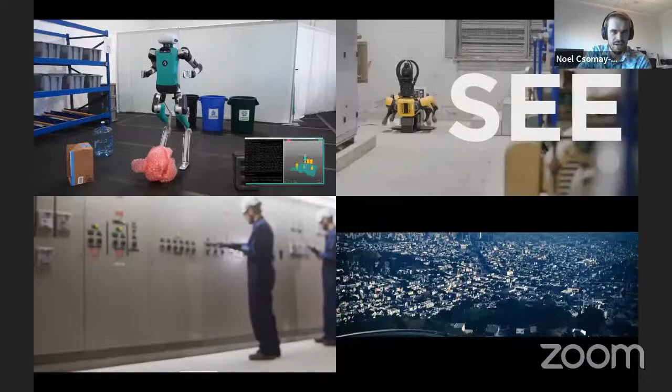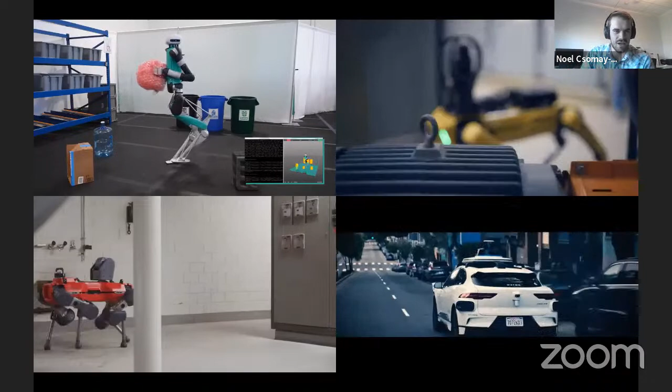So maybe just to set the scene, where are we with the status of robotics today? We're seeing deployment of systems in a way we really haven't, even a decade ago. Digit, in the top left, just got employed by Amazon. We have Spot and ANYmal in industrial settings doing inspection, and self-driving cars all around.

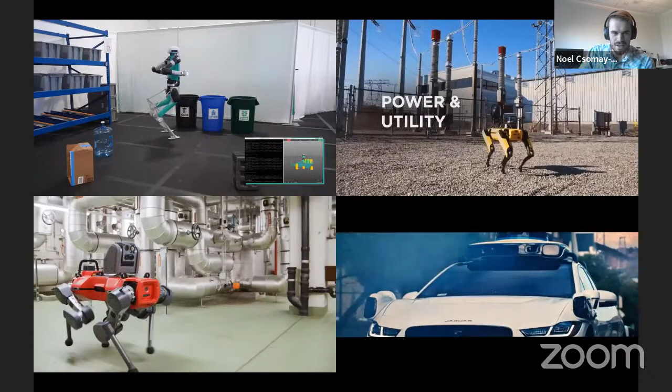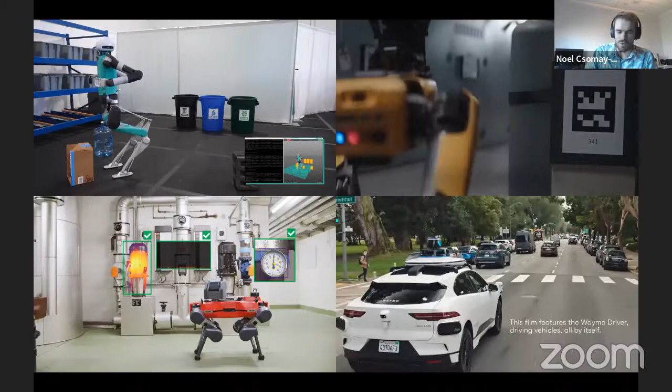So we can now, for the first time, really start to ask systems-level questions. Can I complete some task, and design a whole stack to accomplish that, all the way down to the motor torques? This is in contrast to before, when maybe 10 years ago we were falling around and didn't even know how to walk.

The problem setting we're going to focus on is this abstract one: on the left-hand side, I'm asking a robot to complete some task, and then I want to design some sort of policy where at the end of the day I have to send torques to the robot.

I was listening to a talk by Animesh Garg at ICRA, and he had this beautiful separation of what we're trying to do and how we're trying to do it. We're going to focus on how to achieve these tasks, and I'm assuming that the semantic level understanding of what we're trying to do has been taken care of.

So instead of abstractly saying 'complete some task,' let's say specifically that it has been parsed by your favorite language model and a LERF to give you a goal location and maybe some understanding of your environment and the obstacles in it.

The classical robotics perspective on how to achieve a task like this is to split it up into subcomponents. Maybe first we'll do a high-level plan, like a decomposition of my space, giving me waypoints. Then from those waypoints I'll produce trajectories at a mid-level. And at the low level, I'll try to track those trajectories, and that'll give me torques.

One benefit of splitting it up this way is that each level has a canonical model associated with it. At the low level, I have to reason about the full nonlinear dynamics of my system, because that's where I'm applying the torque. At the mid-level, maybe I have some discrete-time but continuous-space representation. And at the high level, maybe I have a graph structure. By splitting it up, I can leverage these different model representations.

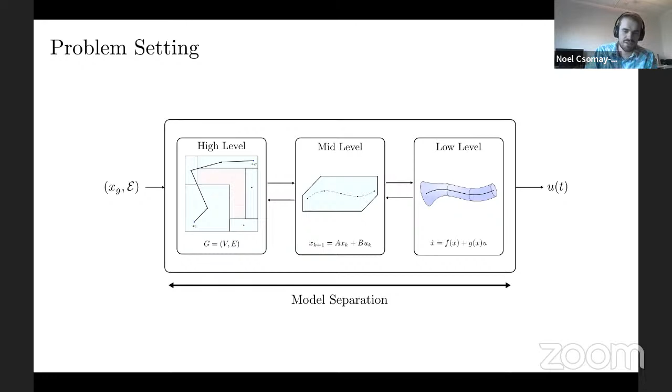Furthermore, there's a timescale separation. At the low level, I have to execute very quickly for dynamic stability, but at the high level, I probably don't have to reason so quickly about my environment.

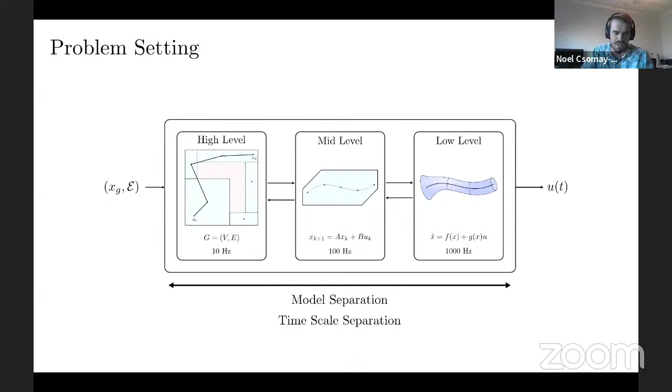We're going to explore this in the context of some recent work I did with a hopping robot. Just to give some concrete instantiations of these levels: at the low level, we're trying to command torques to spin these motors; at the mid-level, I'm producing trajectories for stable hopping; and at the high level, I'm trying to reason about how I'm interacting with my environment.

This interaction with the environment is something I'm currently working on, so I'm not going to talk about it very much in the context of the hopper, but we'll discuss it a bit.

Since we'll be using this platform as a motivating example throughout the talk, let's introduce it. This was designed and built by a previous graduate student in the lab named Eric Ambrose.

The state of this robot includes an orientation and a position, so SE(3), and also four additional coordinates for the flywheel angles and the foot position. The input has four components: I can control the flywheel motors, and I can also compress the foot.

And you'll notice that the number of inputs is far less than the state of the system. So this is a very underactuated system, which means the control has some complexities, which we'll discuss. And in terms of compute on board, there's just 2 teensies doing the feedback control, communicating over Wi-Fi with this off-board desktop, which I would say is decently powerful.

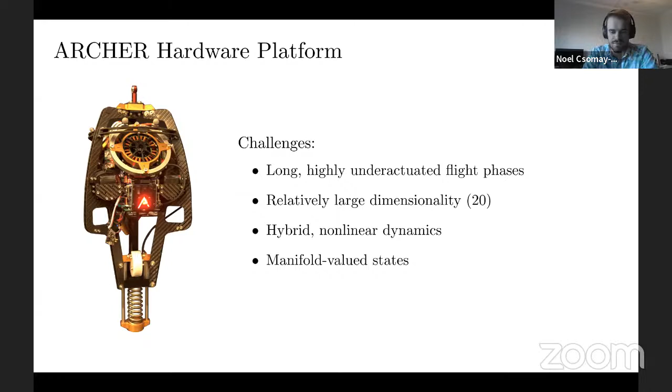Okay, so let's take this system in this example scenario. Let's say I'm starting at an initial condition and I want to get to some goal location. And here's a map of my environment, some clutter. And remember, this is a state space of 20, my input space is 4, and I've got nonlinear dynamics.

So what's one way maybe to achieve this task? Well, let's take a high-level perspective and maybe do some sort of kinodynamic path planning, some RRT with some refinement at the end. Maybe this was actually kind of hard to do, right? Because I have to reason about the full state, these hybrid nonlinear dynamics, and I have to solve these 2-point boundary value problems or roll out these open loop trajectories to stitch together.

And at the end of the day, what do I get? Well, I get a sequence of these open loop control actions. And if I play those forward, I'm probably going to diverge because I'm using model approximations and I've got disturbances at the end of the day.

So what would I do instead? Well, what I would rather do is just say, what's the task space that I'm operating in? Well, right here, I'm just considering the plane. So why don't I just consider states in the plane, some 2-dimensional state? And if I had 2-dimensional inputs where I could control the XY position or XY velocity, let's say I have single integrator dynamics, that would be best. And I would just hope that when I pass that plan down, somebody is able to track it properly.

Now, the somebody who tracks it properly is me. So we're going to talk a little bit about what it takes to track a signal like that, why it's even well posed. But if you do this, this is kind of a decomposition of the problem. You still might crash into your obstacles or diverge. And that's because the tracking controller that we design is probably not able to execute the plan perfectly.

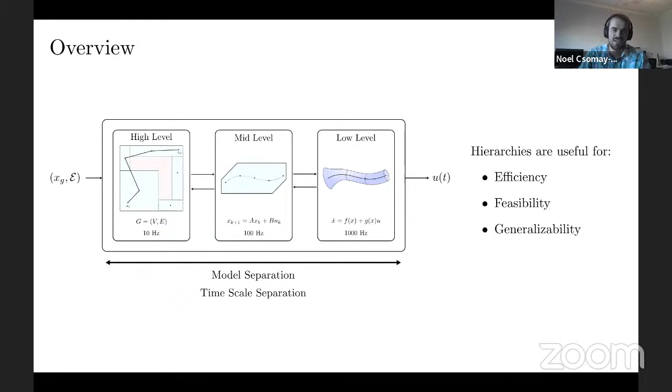Okay, so that's kind of the summary of what I want to talk about. When we think about tackling these complex problems, thinking about it in a hierarchical way is useful because of efficiency, feasibility, and generalizability.

Okay, so here we are in phase 1. This is me about to take a deep dive into control. So we'll go through that and then we'll resurface back in the context of these other points that I wanted to make.

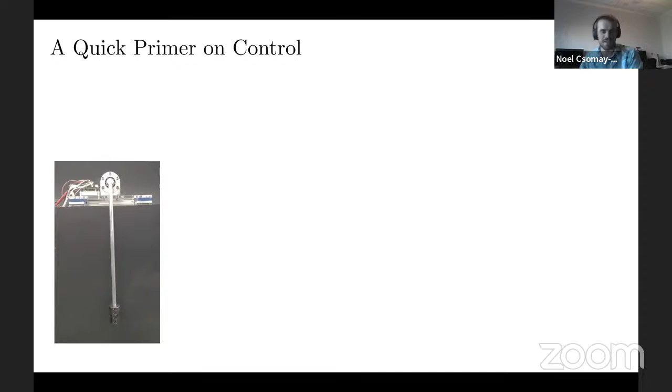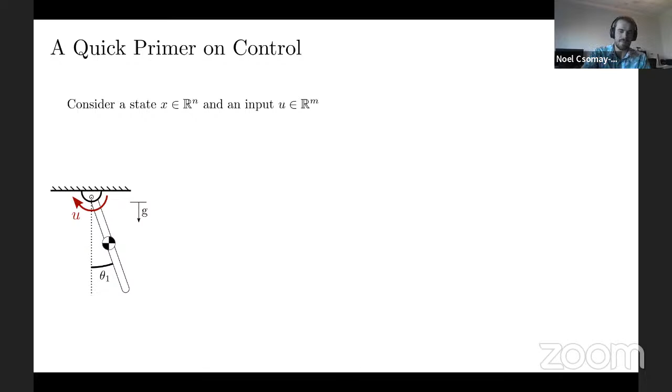Okay, so here we are. I'm calling this a quick primer on control. So what's the point of control? Well, I view the point of control as getting systems to do things, or meeting objectives. So here's a system, this is a pendulum that I just found in the lab and took a picture of. So here's a physical system. We're going to start with some mathematical model of the system, so I'll take a state and I'll consider the input. And how are the states and inputs related? Well, they're related through the dynamics.

So the time rate of change of my state is a function of the current state and also the control input that I'm applying. So how do I view dynamics? I view it as a vector field. And how do I view controller design? I'm trying to shape the vector field to have a desirable property. So now we have to have the language of what's a property that I could want my system to demonstrate.

One of them, for example, is stability to a point. This is a classical thing that we would want my system to do. Let's say X star here is the origin that's given to me maybe by a high level planner, and so I want to say I can exponentially stabilize to this point. Here's how I would write that down: the error signal is bounded by this exponential curve.

This is a statement of what we want to achieve. So now we ask the question, how do I choose a feedback controller to give my system dynamics some desirable property of stability, to shape this vector field in a desirable way? One way to think about doing this: we have the expression right here, let's solve for x of t in terms of u of t. Maybe I'll get a condition of what U of t should do in order to satisfy this specification.

Now, as a little exercise, let's try to think, what is x of t for the pendulum? And spoiler alert, you can't write x of t in analytical form as a function of u for the pendulum, even for the simplest system. There's ways to approximate it, sure, locally it's like a sinusoid, and then maybe I can do some sort of approximate trajectory for it. But at this level, we're focused on precise statements. What can I guarantee about the system? And so if we can't write the solution down, what hope do we have of saying that we'll meet some stability criteria? This is where I think there's some beauty in what's called Lyapunov theory.

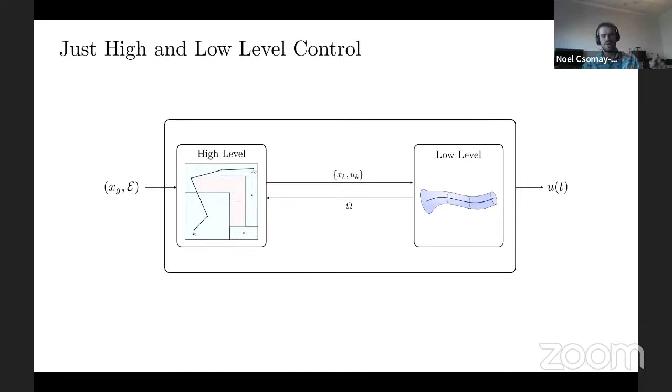Okay, so now we're experts in nonlinear control. Let's plug the pieces together. Let's take the plan that we got from the high level and just track them. Let's do this for the system of interest, the hopping robot, and let's see what happens.

So the high level objective is just to stay where you are. It's maybe not quite a high level objective, but that's what we're taking it to be. And I'm starting with some sort of error in my initial state, and I'm just using feedback control. We see that the hopper starts to diverge, goes to the right, and is unable to go back to the original position that I wanted it to go to.

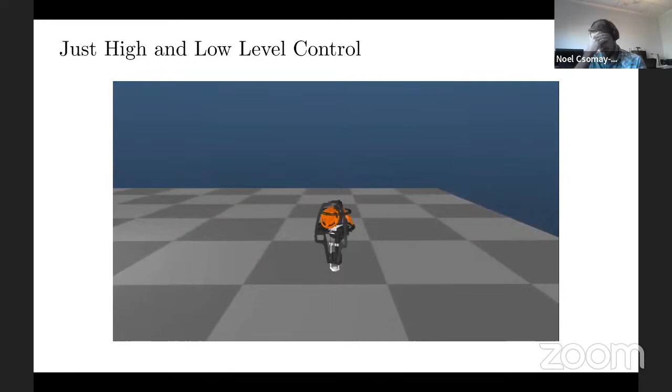Okay, so this kind of counters what I was talking about. We said, well, we can track trajectories, but now it seems we're unable to do this. And the statement of why that is goes along with my perspective on why low-level control is not enough to achieve this task. It's exactly what I talked about: the construction of which error coordinates are valid.

So if we look at the hopping robot, I have actuators to control the orientation. But when I am in the flight phase, when I'm in the air, I cannot control the lateral position of the hopping robot. This means my control input has no effect instantaneously on where I am in positional space. And because this Lyapunov condition is an instantaneous condition, I cannot choose this XYZ position as a valid output.

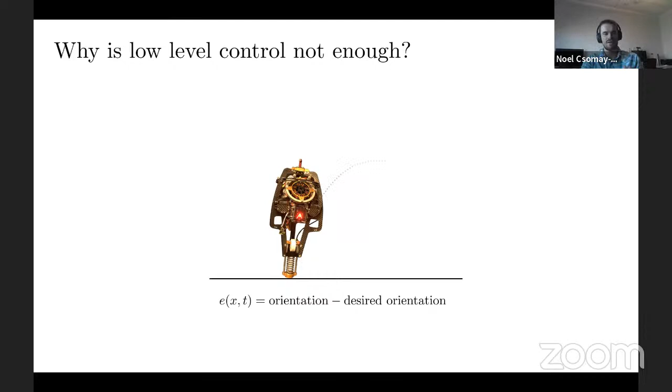Okay, but I have actuators, so what can I do? Well, I can choose the orientation to be my desired output, and I know I can converge the orientation exponentially fast. But then after some finite time, because I'm converging exponentially fast but not in finite time, I'll have some error when I hit the ground. That error will propagate, and that'll lead me to start diverging.

So to summarize what I just said, output stability is not the same as full state stability. This really comes to a head in the context of underactuated systems, when I care about stabilizing my full system state. Now, another limitation of just having low-level control is that we did not reason about input constraints or state constraints. So when I said there exists this controller where I'm canceling my nonlinearities, that might take arbitrarily large torques. But for this system, for example, there's a maximum torque I can apply.

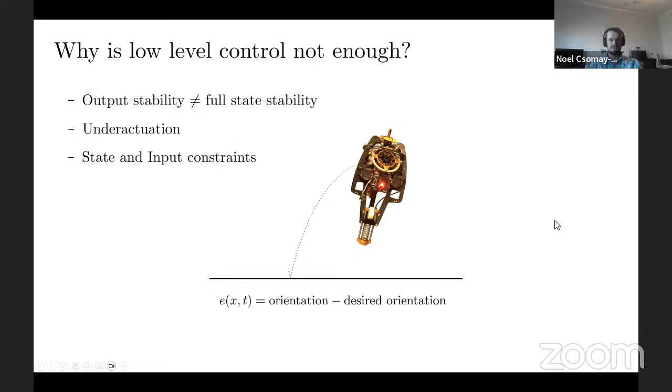So how do we reason about state and input constraints? And how do we reason about stabilizing the full system state? Well, this motivates the introduction of a mid-level, right? How do we do intelligent trajectory design? So now I'll talk a little bit about model predictive control in the context of how it was used to stabilize this hopping robot.

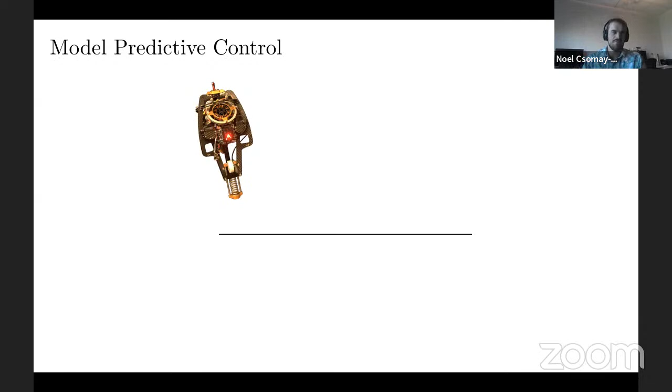Okay, so what is model predictive control? Well, I take my model and I predict how my current control actions will affect my future state. So as opposed to having these instantaneous convergence conditions, now I'm planning over a horizon.

How do I do that? I solve this finite time optimal control problem. So I'm solving for a trajectory, a state and input trajectory in time, which minimizes some cost, subject to my nonlinear hybrid dynamics, satisfying my state and my input constraints. And that starts from where I am.

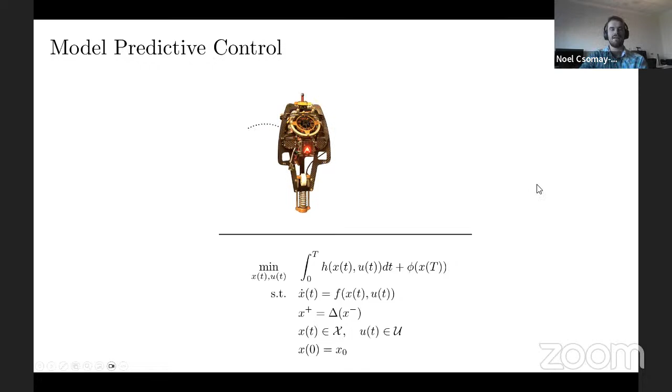What do I do then? I apply the first control action along this trajectory. And then to get some sort of closed loop performance, I replan.

Okay, so the first part of MPC is the model. Let's just discuss the hybrid model for the hopping robot. So I have a flight phase where I have these continuous time dynamics. Then I go through a ground impact where my foot velocity goes instantaneously to 0. So I've got this jump in the system state. Then I have some ground dynamics.

Then, those execute quite quickly. And then I hit the hard stops of the robot and I enter the flight phase again. So this forms 2 cycles on this hybrid graph.

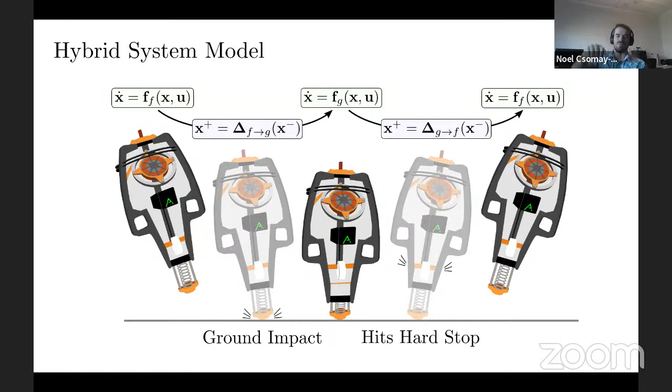So when we're planning, we have to plan over this full hybrid state. And the reason we have to do that is because when I'm in the flight phase, I can't control the position of the system. So I have to decide what orientation should I be in when I strike the ground, which means we have to plan through the strike of the ground in order to determine what I should be doing in the intermediate steps.

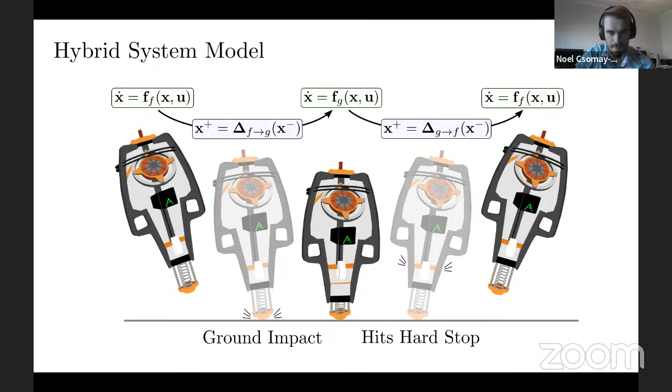Okay, so maybe a little bit quickly, how do we structure this problem of model predictive control? So I've got my dynamics, these hybrid dynamics, but as I stated, this finite time optimal control problem is infinite dimensional with these non-convex constraints. So we have to use model approximations.

So what can I do? Well, I can linearize my system dynamics around some reference trajectory and then discretize. And so now I've got this discrete time linear system that I can use for planning.

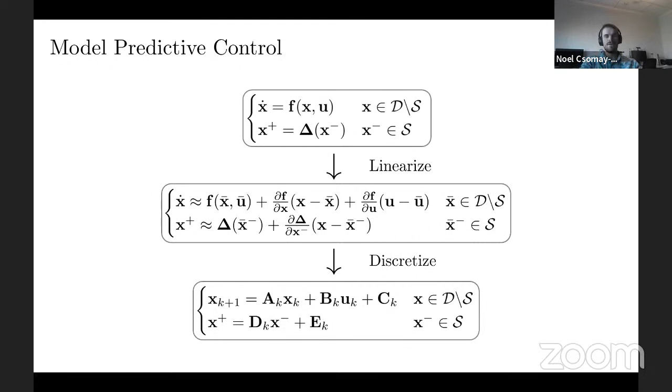So there's one issue, especially in the interface of how this model predictive control layer goes into the low-level controller. The low-level controller requires dynamically admissible trajectories. But because there's this space of orientations that the hopper lives on, if we just approximated that constraint of this orientation manifold, I would get states that leave this manifold constraint, and they would not be admissible when I pass them to the low-level controller.

So part of the effort of this was phrasing MPC in a geometrically consistent way in order to make the interface between it and the low-level controller sound. So just in pictures quickly, how do we do that?

So if I have some reference trajectory that I want to linearize my system dynamics around, I can pull the start of that trajectory back to some identity element, like the identity orientation. And then I can use what's called the log operator to get me into a vector space. So now I've taken this state that existed on a manifold, and I'm in a vector space now where I know how to take Taylor approximations.

I know how to approximate my system dynamics. I can solve for a trajectory in this vector space, and then I can project it back onto the manifold. And this is locally a bijection. This projection operator is exact.

Okay, so those are the pieces of how we phrase this in a geometrically consistent way. So now the decision variables of MPC for this hopping robot are the full system state, including these geometrically implicit states. And what do we do? Well, I phrase this now as a quadratic program.

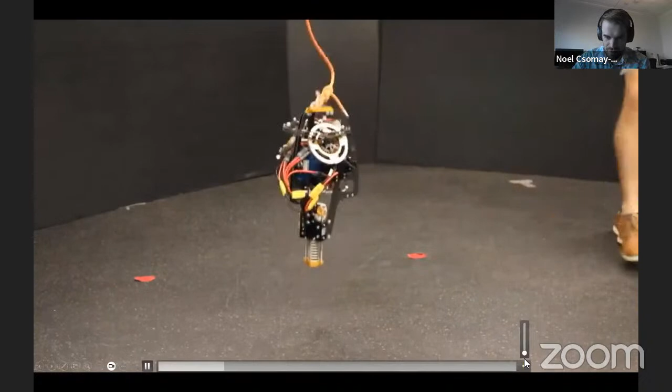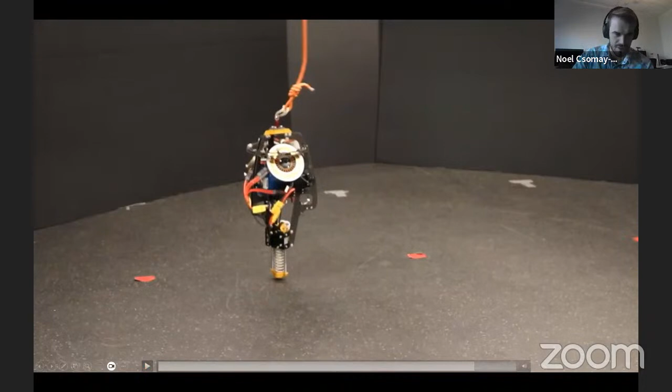Okay, so what's the result? Maybe we said we like robot sounds, so I don't know if that's coming through, but the result is that we can get stable hopping on the hardware of this robot. And here it just, I'll just play it until the end so you can see. The foot stopped after 50 hops.

And then lastly, because we phrase this in this geometrically consistent way, we can explore the space of orientations and do flips on a system. So that's a fun little result as well.

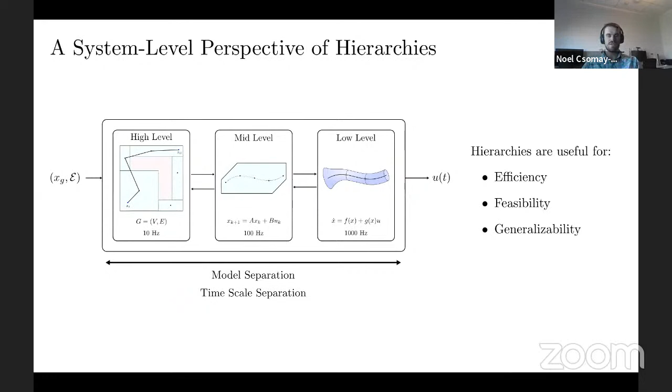Okay, so that was a deep dive into this block of low-level control and this block of mid-level control, especially in the context of the hopper. But now I want to take a step back and present this system-level perspective of hierarchies, right? So when people are doing the design of algorithms, they're embedded in these individual levels. How do I construct a feedback controller which is able to track? How do I construct a good mid-level controller? But I think a lot of the interesting questions here are, how do I interface these pieces together? And if I think critically about the interface between these pieces, what do I get, right? And the points that I want to make and reinforce are, I get notions of efficiency, feasibility, and generalizability. So let's explore those in the context of these hierarchies now.

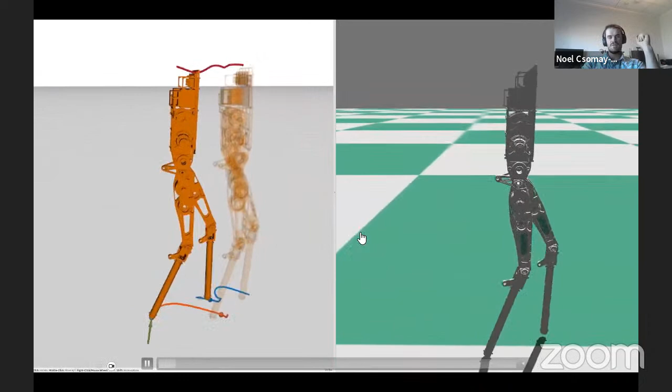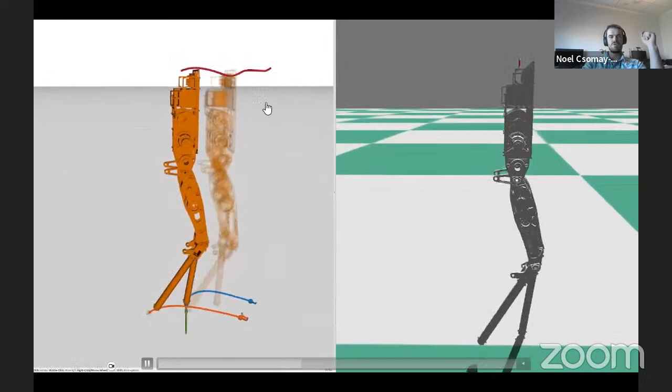So here's a demonstration of, again, a very similar methodology, but applied to a new system. So here we see the horizon, the forecast of MPC. Here's the forecast of the footsteps. And this is as we disturb the system, it's able to stabilize dynamically. So it's adjusting its footstep length to account for these disturbances while trying to track this user command of walk forward at a specific speed.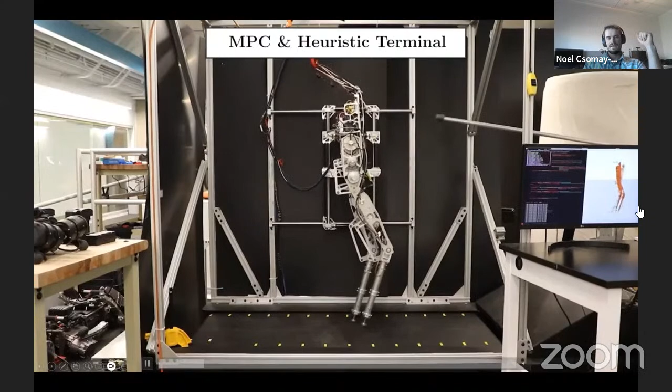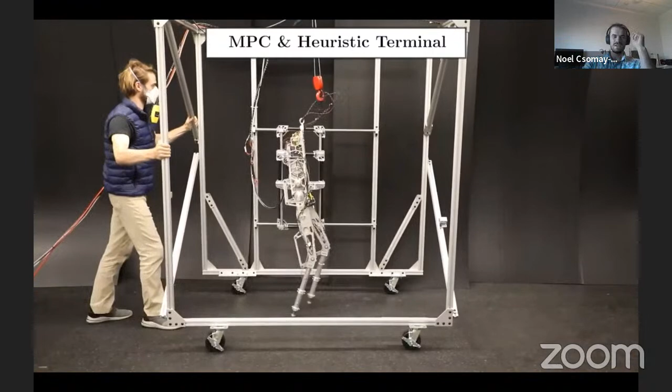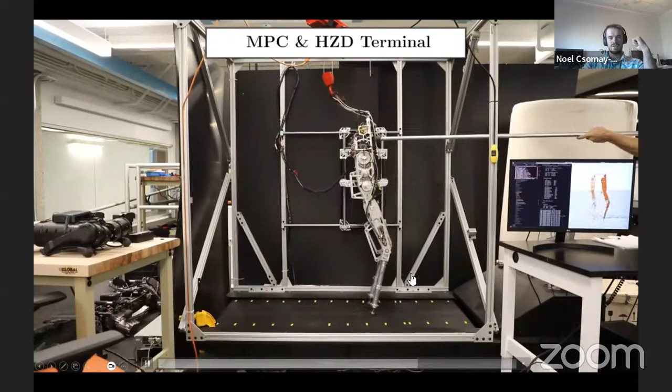And then we can also show this on hardware. We said we like robot noises, but there's a voiceover in this video, so I'm not going to- the footstepping is quite compelling, you can hear it in the video. But anyways, here's the same method of nonlinear MPC applied to this walking robot now. So I should say this is a planar walking robot, so it can't fall out of the plane, but it still has to step forward and backwards to stabilize itself. And we're working on extensions of this to a 3D robot now.

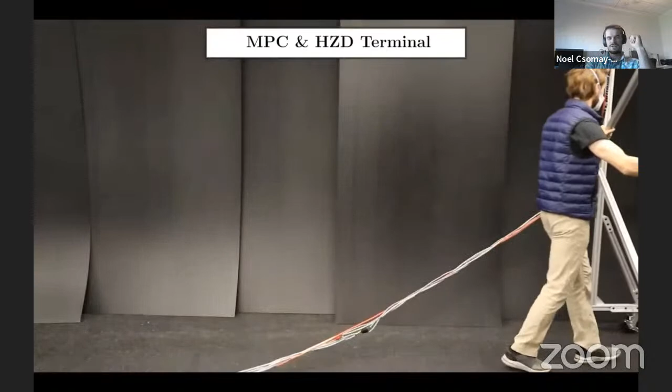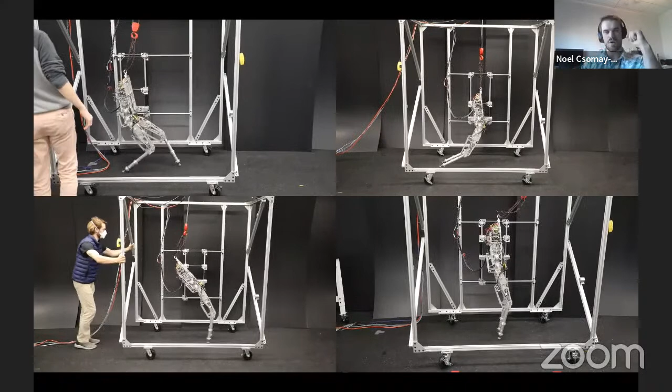Okay, so in the context of what I talked about, I talked a lot about model-based methods for designing these controllers. And maybe a question you should have is, do I think that these work well? Or do I think that these are generally extensible? Or what are the issues with them, I guess? So here's some failure videos of when it didn't work so well.

And what's one of the problems with this? Well, the model of this robot, which I assumed I had and leveraged to make all of these statements, isn't so good. It's got these harmonic drives, where the model of the harmonics is temperature dependent. As the grease warms up, I get different properties. This is a nightmare to model.

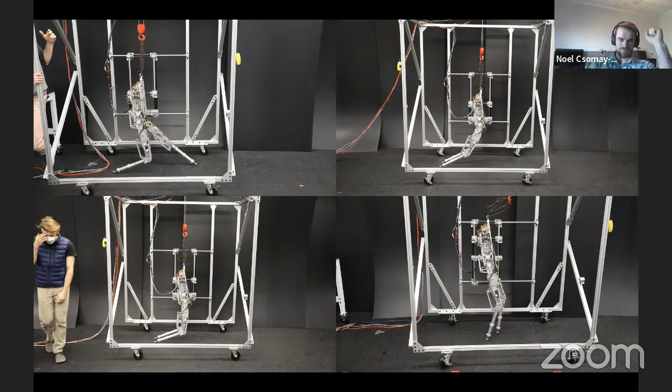So how do we think about that in the context of these hierarchies again? Well, another point about generalizability is once I've specified this input-output structure, I can use different methods in the same way. That's useful because I can think about problems in isolation as long as I understand their context. But I can also structure what happens at each level. So if I wanted to replace, say, my graph of convex sets with an RRT, I know what the defined input-output structure should be, what my expectations are, and I can use that to design the algorithm and as a debugging tool. I'm basically making formal statements about what this block wants and what I can guarantee from it.

So now, how do we think about this in the context of learning? I said we had a poor model, and the first response should be: okay, why don't we learn the model? So this is where learning might be beneficial to include in the hierarchy. But I think the converse is true as well, that the hierarchy is useful to structure the learning problem. Here's one way we explored this.

Again, the model of this biped is quite poor. So what did we want from the hierarchy to begin with? We wanted to satisfy these certificates of performance. Here's an example of a certificate: I'd like to converge to this set and stay within it, in the same way we wanted to converge and stay within a set for Lyapunov. So I'm going to pass this certificate into a learning problem where the loss function is exactly whether I satisfy this certificate or not.

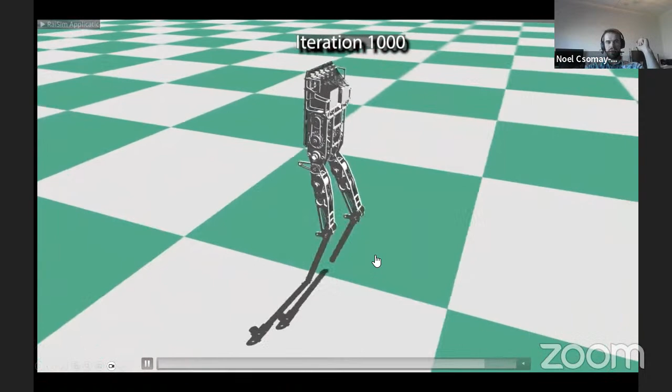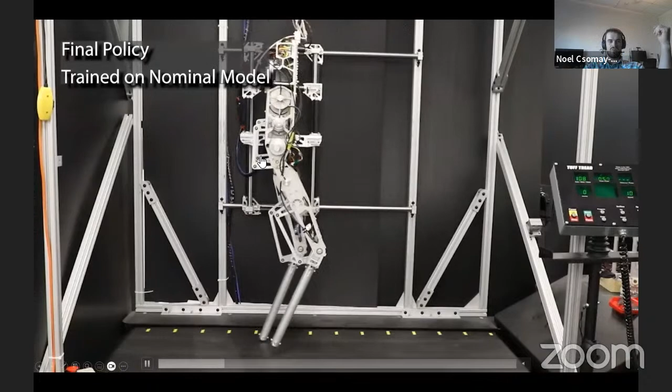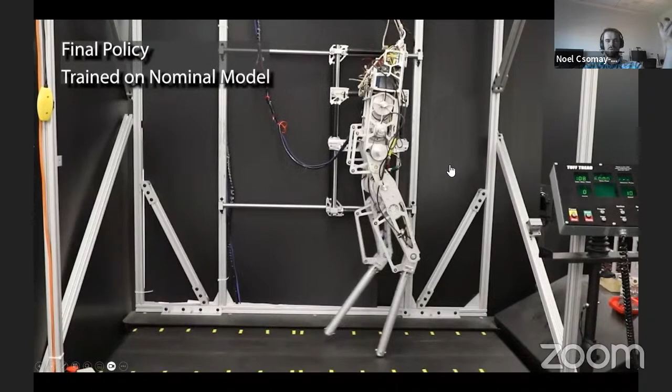So at the end, here is the trained policy, running a neural network to walk in simulation. Now when we deploy it on hardware, we see the initial pass doesn't work so well, it's falling forward. Okay, well, we used a model in our training process, so let's collect the data, fold it back into the learning process, and retrain a policy with this hardware data.

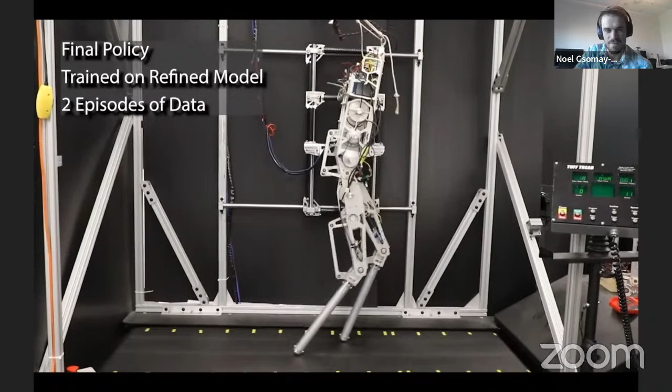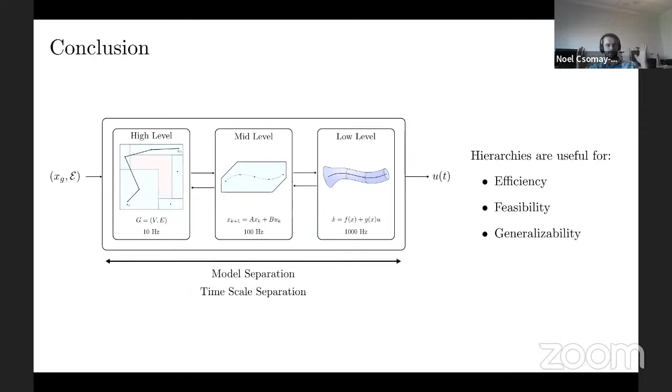So just to conclude, we talked about this complex problem of passing in some task specification or semantic information and outputting some trajectory in time. The statement I'm trying to make is we should look at the structure that exists in the problem, specifically the communication between the blocks of this hierarchy. If we do that, we have a separable problem, and we get these notions of efficiency, feasibility, and generalizability. Hopefully I've convinced you of that at least a little bit. I want to thank you for inviting me, for your attention, and all the people I collaborated with on the projects presented here.

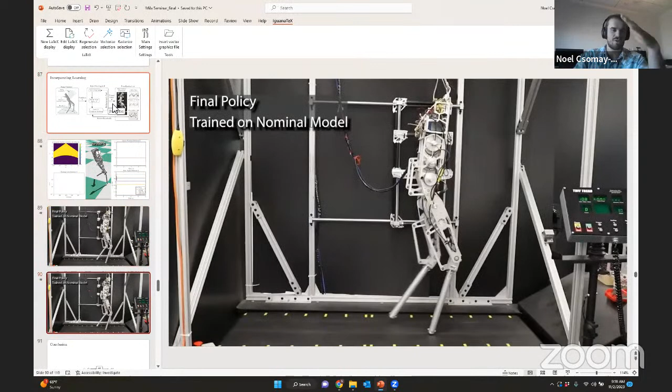So when I say I'm back propagating the loss, I'm going through the model in order to back propagate it. If my model is bad, then probably when I deploy it on hardware, I'm not going to satisfy the certificate I wanted. There's also this time delay, which is that if I train the policy, collect data, train a residual, and pass it back in, my new policy is going to be kind of different from the data I collected. We just did it a few times and saw it resulted in good performance that was able to satisfy the certificate. But it's interesting to think about when you'd expect that to work or not.

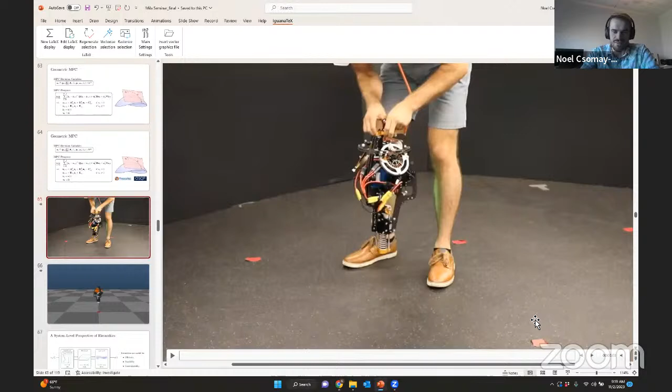There's a point here - let me turn the video sound up again, and we'll play it and talk about it.

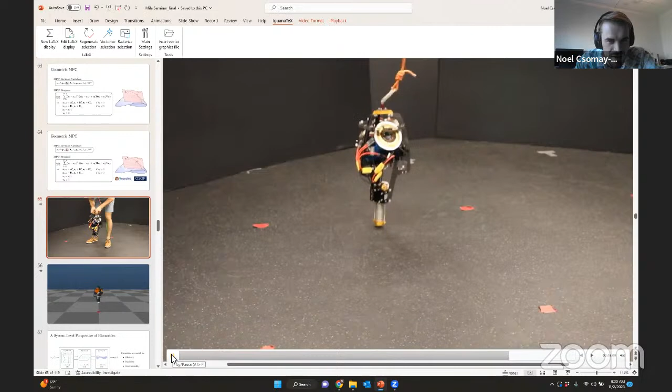Listen to the high-pitched squeal coming from the flywheels - it sounded like a jet engine taking off.

What happens is, I'm assuming I can apply torque on these motors, but at a certain speed I saturate the actuators and can no longer apply torque. So there's this very weird behavior where after 30 seconds, I get this screaming of the actuators and then I can't hop anymore, basically.

And what's a way to resolve this? Sorry, let me close this email.

Let me motivate this: say I'm hopping to the right, applying a constant torque to the right. That means I'm always increasing the speed of the actuators in one direction, and after a certain amount of time, that's going to saturate. So you can imagine the hopper hopping to the right, then spinning 180 degrees and continuing hopping to the right to spin down the actuator.

This is a very complex behavior that would be difficult to encode in these horizon-based planners, I think. So I'm interested in exploring the use of learning as a way to design a policy that's able to emergently demonstrate a behavior like that.

But the dimensionality is high, as you said, right? So this is a point that I didn't make, and now I feel like I can. Okay, what's the best slide to make this point on?

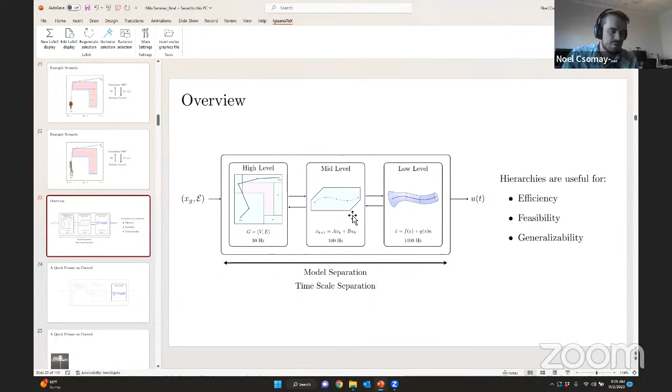Now, for the dynamics, I have to approximate. And there's a really interesting question here: I wrote down this linear discrete time approximation of the dynamics, which is approximating them in some way, but not exactly. So the question of whether this works or not depends exactly on how well the low-level controller can track approximate trajectories. I can do this analysis where I have some approximate trajectory I'm sending down, and a representation of how well I can track it. This at least provides a language to analyze whether you satisfy that property or not.

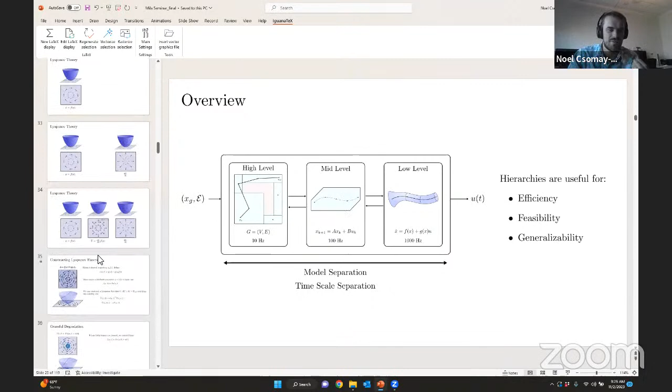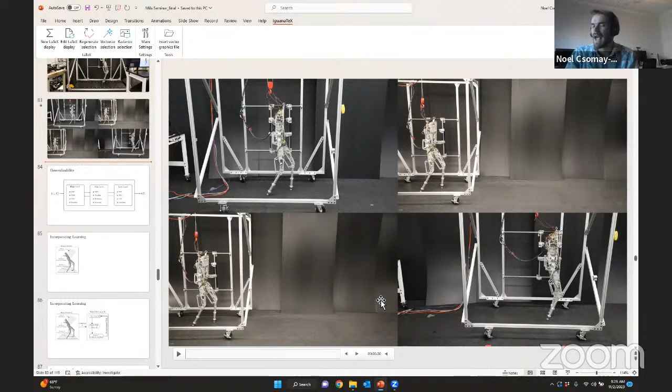Now you asked an empirical question: do I notice difficulties on hardware? In the approximation of the dynamics on this robot, yes, there are difficulties—there's difficulty in the dynamics themselves. I'm not sure how much additional error the approximations are causing to the system. I think actually, because we're running this at 100 Hertz, the approximation of the dynamics is not necessarily the issue—it's the representation of the dynamics themselves. And we're able to run the approximation at really high speeds now. So I think those local linear approximations may not necessarily be the issue. But thinking about whether that's justifiable is a very interesting question, especially in the context of how these two blocks interact.

Makes sense. Thank you. Thank you.

See, there's some chat, I'm not sure. Oh, thank you.